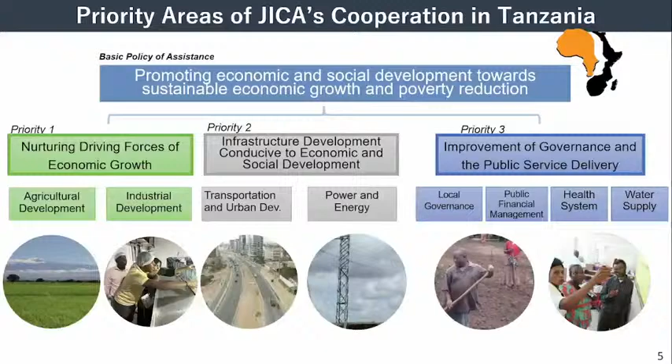In this pillar 2, we have sub-pillars: one is transportation and urban development, and the other is power and energy. So this priority is where we are mainly targeting infrastructure development.

I'd like to say again, there is an area for collaboration between these two countries. I sincerely hope the Japanese participants recognize this potential for future development and further collaboration.

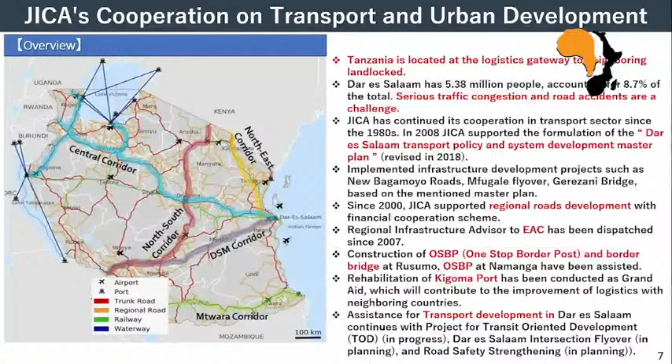I'd also like to talk about rapid urbanization. As the Honorable Minister has already mentioned, rapid urbanization is one of the crucial challenges, Changamoto, for African countries including Tanzania. In our activity in the transportation sector of Tanzania, we have been focusing on development of the regional road network and development of urban infrastructure.

The other trend is the increase of technical cooperation. As engineer Kakuya-san already mentioned, technical transfer is an important point of our experience and activity. JICA is also putting emphasis on technical cooperation, and therefore the number of technical cooperation projects has been increasing.

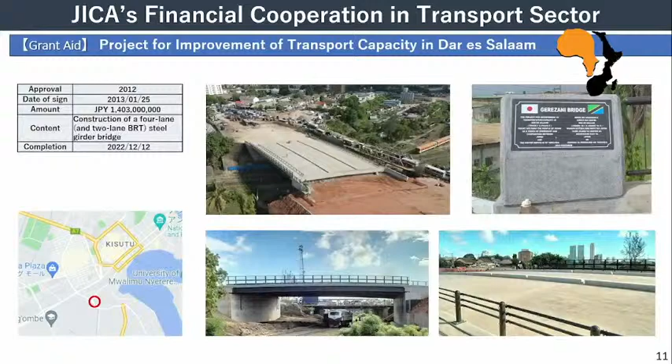We identified this project through the formulation of the master plan. You can understand how congested this area is, and this area was a crucial bottleneck of transportation in Dar es Salaam.

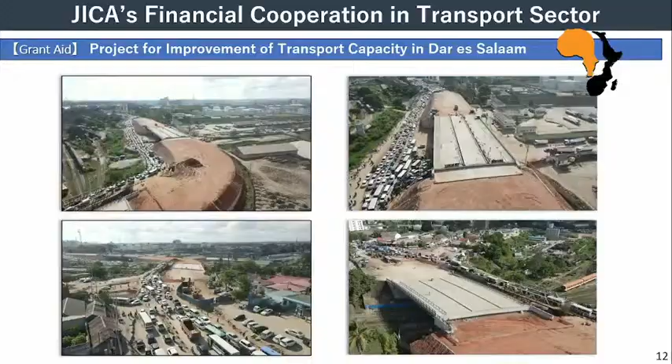I'm very proud that through the formulation of the master plan and the identification of the project, and then implementation of the grant aid project, we can contribute to solving these challenges in the transportation of Dar es Salaam. I heard that before this grant aid project, it took around 1 hour or 1.5 hours to pass this area, but nowadays it takes just 5 or 10 minutes. As your minister said, it saves cost and time, and contributes to economic activity and improves your living environment. I'd like to say again, I'm very proud that JICA has contributed to the development of your environment.

Next, I'd like to add another character of our financial cooperation, not only technical cooperation but also financial cooperation. JICA has contributed to capacity development. We have considered that the actual project site can be a good opportunity for capacity development of Tanzanian construction companies, engineers, workers, and counterpart agencies. You may already understand the good example of the Vietnam case, but I can say in Tanzania, in our project, we have contributed in a similar way. Concretely, we considered maintenance sincerely at the designing stage and the actual construction stage, put emphasis on quality control, and also took care sincerely about the safety of the construction site.

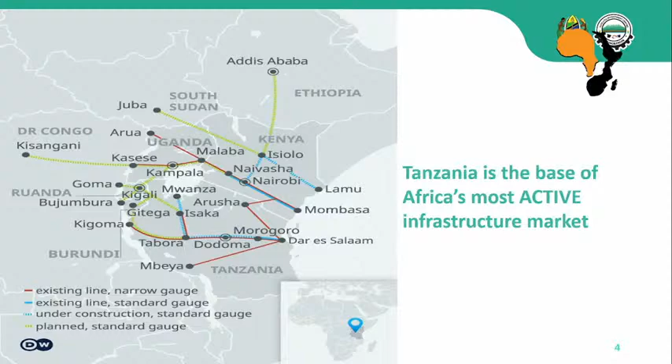When you venture into the markets, it will be easier for you with this infrastructure system. It's currently operational, with part already finished and the rest in progress. The idea is that we're going to be quite easily connected, with easy access to the East African part of the countries - from Tanzania to Rwanda, Burundi, Ethiopia, and DRC will all be easily connected for you to move from one place to another.

When it comes to power supply, definitely when you invest, power cost matters. When you compare Tanzania to the nearby countries, we're relatively lower cost compared to our nearby East African countries. From our island to our mainland, the prices are relatively lower compared to other East African countries like Kenya, Rwanda, and so on.

We mainly have 3 categories of investment in Tanzania. The first one qualifies you to be TIC registered. For a foreign investment such as yourself, the minimum threshold to qualify is $500,000, taking into account all your tangible assets for your investment. If you choose to partner with a local, we'll look at who has the most shares for qualification - if the local has majority shareholding, it will be $50,000 US, and if you have the major shareholding, it will be $500,000 US in terms of the value of investment.

For the other 2 categories, B and C - the strategic investor status and the special one - they are both government recognition statuses, whereby as a government we recognize the level of investment you've done in our country, and give you a chance to request custom incentives for your investment. They're called custom because it depends on the nature of your investment. Depending on what you need in addition, you can request, and TIC will present to the committee, and they will be discussed and approved, and you get to enjoy those plus the standard incentives everybody else gets to enjoy.

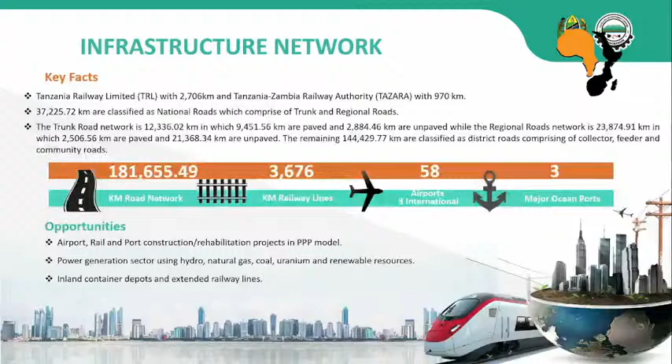We have projects available for PPP as well as for private investments, of which you could choose to take up for infrastructure network investment. For the energy sector, we have opportunities for oil and gas as well as electricity. There are also projects readily available for investors looking to take them up.

So if anyone has interest in this relevant project, we have them outside as well. We can share with you and link you with TANESCO and TPDC, who are also present in this room today.

So what we are promoting here is adding value to minerals, the whole investment of adding value and trying to reduce the rate of exporting our minerals raw. So there's also that opportunity here in Tanzania.

And for the water infrastructure, again, we are a developing nation, so we have lots of opportunity when it comes to the development of water infrastructure. The Ministry of Water has a number of projects that they're promoting as well that are up for investment. So for any investor within this field who has interest, we can link you up with them and discuss the way forward to take out those projects.

And for construction, real estate is up and coming right now. So lots of opportunities for real estate when it comes to hotels, residential housing, office complexes, malls, etc. As a developing nation, we have lots of opportunity for growth in this area as well that we encourage for investment.

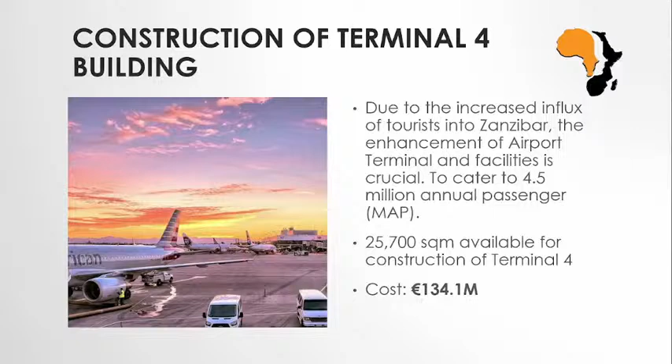Apart from the multipurpose port, we also have Terminal 4. As we said earlier, Tanzania is doing a great job promoting itself outside the continent, and as a result we are receiving a large number of tourists. Recently the government finalized and started operating Terminal 3 at the airport in Zanzibar, but that port is about to reach its peak capacity in terms of annual passengers. Because of that, the government has allocated approximately 25,000 square meters of land for construction of a new terminal building to cater to the increased numbers.

As we can see, the government is doing a very good job promoting our country outside. So this is another area where we are looking for investors to come and partner with the government to construct the new terminal building. For those interested in the design or technicalities of these projects, during our B2B session they can meet with the relevant ministry, our Ministry of Infrastructure, to get clarity on this project.

In terms of our procedures, when you want to invest in Zanzibar, it's very simple. The main sectors we look at are hotel and real estate, since they're the driving force of the blue economy policy, but we also have all other sectors categorized as others. For foreign investors, you require a capital of 2.5 million dollars if investing in a real estate or hotel project. For any other sector, you can have a capital of less than 2.5 million, down to 500,000 US dollars, as the capital required.

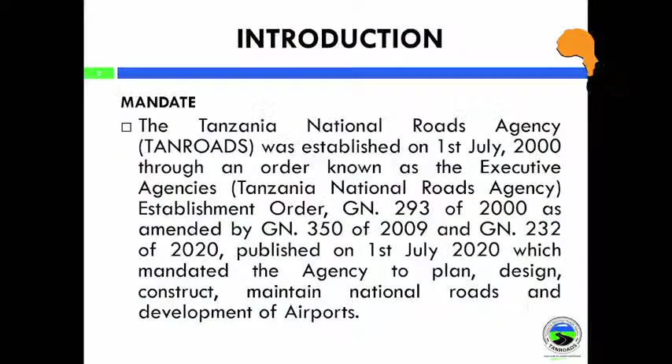As you may all be aware, TANROADS is an agency under the Ministry of Works established for the purpose of looking at the national roads, currently comprising about 37,000 kilometers. The country network at the moment is about 182,000 kilometers, but specifically TANROADS is looking for about 37,000 kilometers that is the national road network, the core network of the country that propels the economy. The other small roads connecting localities and short distances are managed by TARURA, a sister agency under the local government authority.

Out of the 37,000 kilometers that TANROADS manage, only about a third is bituminized. The rest is a gravel road network. This is a clear indication that we have a lot of opportunities in this area. We have a long way to pave these roads, and this creates an opportunity where we can cooperate with many of the counterparts, including JICA.

Tanzania delivers road transportation solutions utilizing about 9 transport corridors that are strategically located not only to serve the country, but also to serve the region. The key strategic corridors of the country are also part of the large East Africa transport corridor, which are vital for serving the other East African countries, as said by other speakers. Our network is also part of the great Trans-Africa corridor, serving not only Tanzania but East Africa and Africa at large.

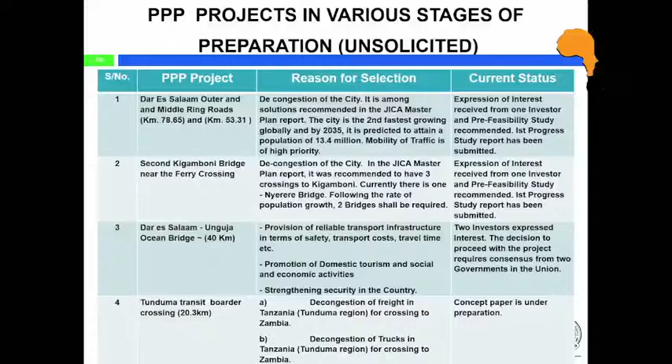As said by other speakers, the focus at the moment is not only on quantity but also quality. Realizing the traffic situation in Dar es Salaam, we are caught between maintaining the existing network and providing additional roads. As spoken by my colleagues from JICA, around 2017 the government of Tanzania, with support from JICA, established the Dar es Salaam Master Plan, and some projects identified in it include the Dar es Salaam Outer Ring Road, to increase roads and address traffic congestion in the city.

The other issue was the second Kigamboni bridge, which has already been presented here. We call it the second because the first one is already operational, and we are planning to build the second one at the place where the ferry currently operates.

There is also, whether we call it a dream or not, a dream to construct a bridge from Dar es Salaam to Unguja, or Zanzibar. This is one of the areas we welcome our colleagues to venture into, looking at the possibility, because the idea exists but has not yet been put into realization. There are several other issues related to traffic congestion, and a lot of opportunities available.

The Tunduma transit border is one of the areas highly in need of attention in terms of alleviating traffic congestion. At the moment, the situation at Tunduma as you cross to Zambia is really not good; the traffic congestion is really pathetic.

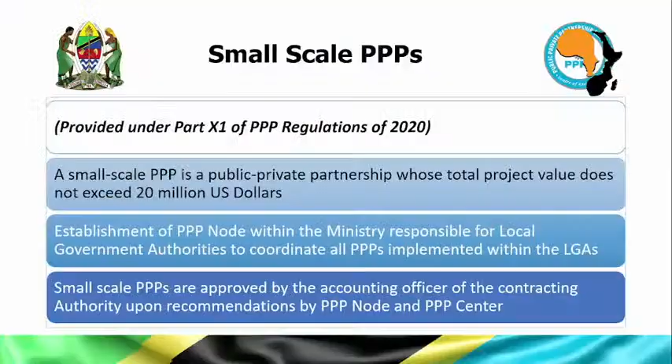These are under the local government authority; the ministry responsible for local government authority is the one who approves the pre-feasibility study of this project. Then the feasibility study has to be submitted to the PPP Center for scrutiny, instead of being submitted to the Steering Committee, which is composed of permanent secretaries, including the Permanent Secretary, Ministry of Finance, and other heads of agencies. This has to be approved by the contracting authority, the implementing agency implementing that project. For instance, TANROADS is implementing small-scale PPP, so the approval has to be given by the Director General of TANROADS. But for large-scale PPP, it has to go through the PPP Center and PPP Steering Committee for approval.

In a nutshell, that is the legal framework which governs the implementation of public-private partnership in Tanzania, which provides a conducive environment. There are many incentives for the private sector to be attracted to implement through this arrangement. As a PPP Center, we are there to make sure that all these projects are coordinated from the initial stage to implementation stage, scrutinizing the projects after the contracting authority has conducted the feasibility study, to see whether the project can be implemented through a PPP arrangement, and to ensure procedures are followed in accordance with the existing legal framework of PPP in Tanzania. Thank you so much.

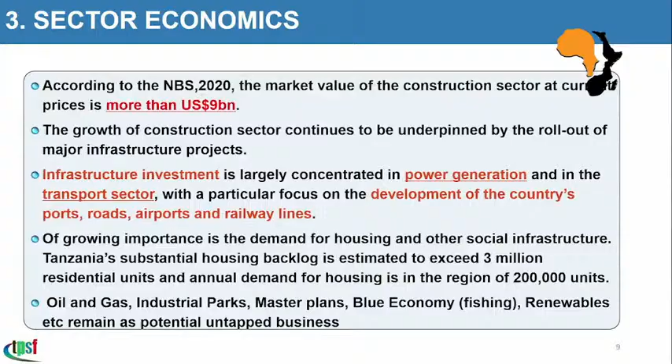Now, these are some figures—I think we've seen some of them, but it just tells the volume of the sector in the construction space. Infrastructure investment is largely, as we heard in the morning, in the transport sector, power generation, and of course mobility—meaning roads, ports, airports, and railway lines, which are quite active. And of course we've heard from TIC and ZIPA regarding housing opportunities.

But the last bullet is mostly on oil and gas—these are kind of new or not really so active industrial parks, the areas of master plan, blue economy, renewables, and of course these remain as untapped potential.

What I've not mentioned here is that we have ongoing effort by the government to introduce a national local content policy, which will guide and structure how the collaboration between Japanese or foreign companies and Tanzanian engineers and companies would look like in these opportunities.

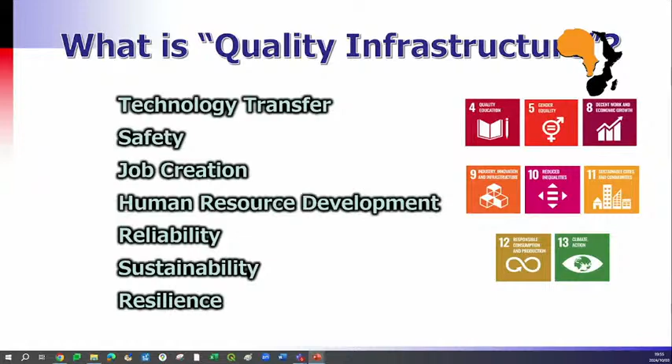Today, using the example of the Tema Interchange project completed in June 2020 in Ghana, I would like to explain how Shimizu implemented those aspects in our actual construction site. The Tema Interchange is located about 20 kilometers from the capital city Accra and about 5 kilometers from Tema port, serving as a crucial transportation hub in West Africa. It is a significant junction where two international corridors intersect. Before construction, it was a roundabout with very high traffic volume, leading to chronic traffic congestion throughout the day. After completion of the project, there was a significant reduction in traffic congestion.

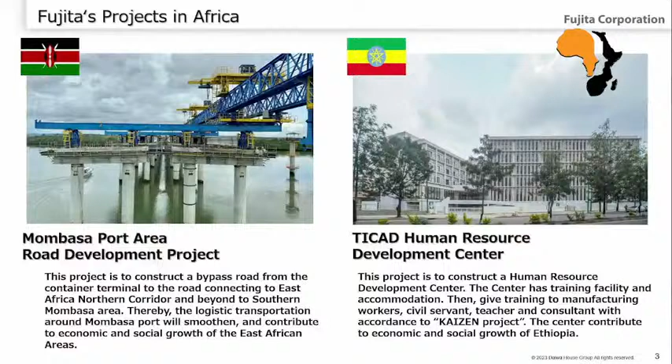Fujita Corporation is a general civil engineering and building contractor, established over 100 years ago, and is a member of Daiwa House Group, the largest housing company in Japan. In Africa, Fujita is currently performing the Mombasa Port Area Road Development Project in Kenya and TICAD Human Resource Development Center in Ethiopia. Fujita is making every effort to realize quality infrastructure through these projects.

Now, I would like to talk about the ongoing Mombasa project with the video. The left picture is from September 2019, before starting works. The right one is at the end of July this year. To bring the project to this point, we have been supported by many engineers and workers.

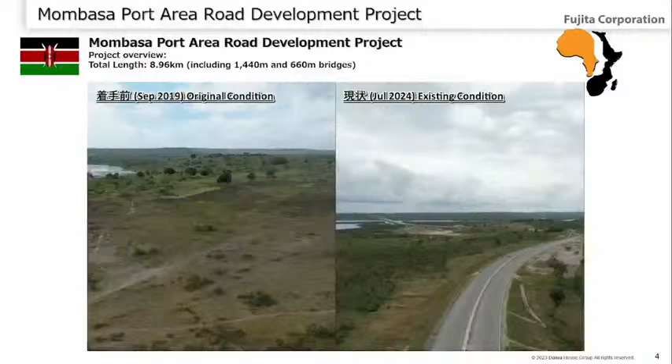I would like to introduce Fujita's efforts in technical transfer to local people through the project. We are committed not only to the successful completion of our project, but also to passing on knowledge of quality infrastructure technology to local people through these projects. As an example, we have held technical workshops and, in collaboration with the local construction association, established a qualification recognition system and issued qualification certificates for engineers and workers trained under the project. These efforts have been highly praised in the countries where they have been implemented.

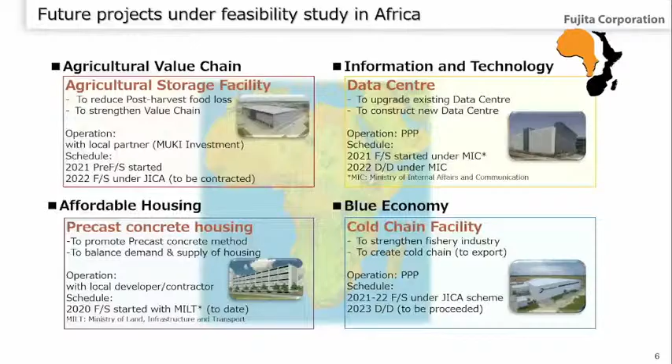Fujita is also carrying out surveys and studies on the feasibility of various projects with a view to the future of African countries. Some of our feasibility studies are for agricultural storage facilities and data centers, and affordable housing and future smart city plans. That concludes our efforts in Africa.

Next, I would like to introduce the technologies Fujita is currently developing. We believe there will be much more demand for quality infrastructure supported by digital transformation in the future.

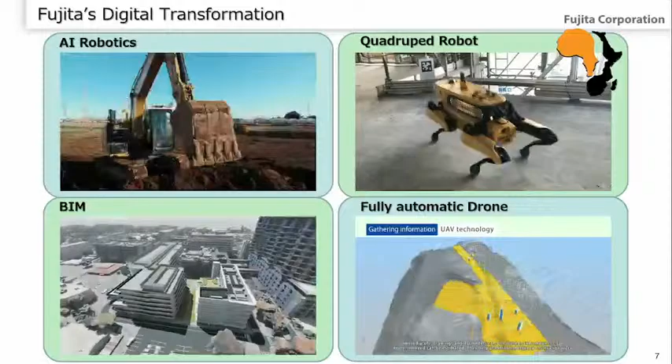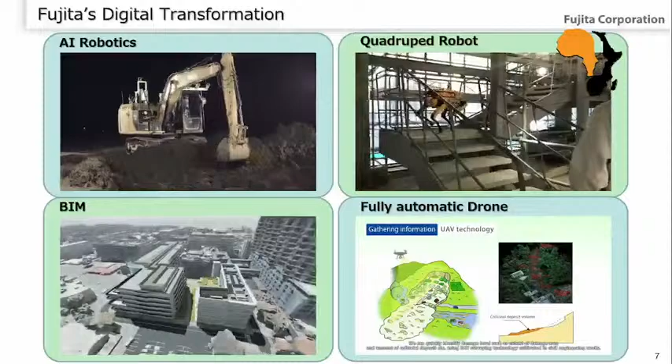The first, upper left, is an unmanned AI robot. Many machines automatically operate themselves. The second, upper right, is a quadrupedal walking robot equipped with a 3D scanner to automatically monitor work progress. The third, lower left, is BIM resident technology. We are able to move around freely in the BIM world by game controller, and this technology enables visualization of the construction site. The last, lower right, is a fully automated drone. It flies over a fixed location at a fixed time every day, surveying and capturing video footage.

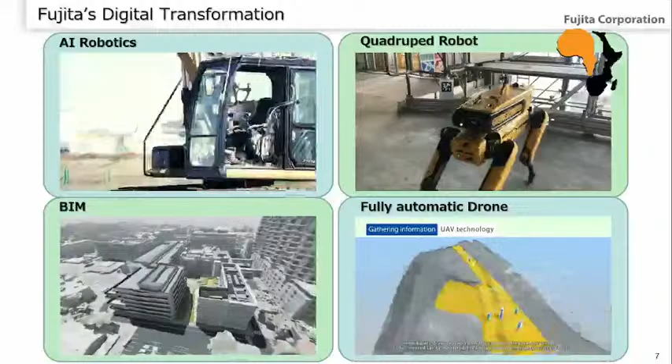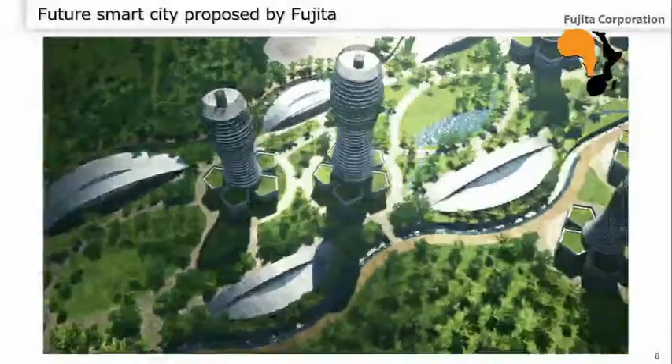Let me show you what Fujita is thinking of as an ideal future smart city. Fujita's vision is that an ideal future smart city provides people with safety and security, comfort, and is people-friendly. Please have a look at the image of the future smart city, rich in greenery. May I present our future smart city with various technologies for disaster prevention, a better environment, and energy saving. We propose a smart city of the future.

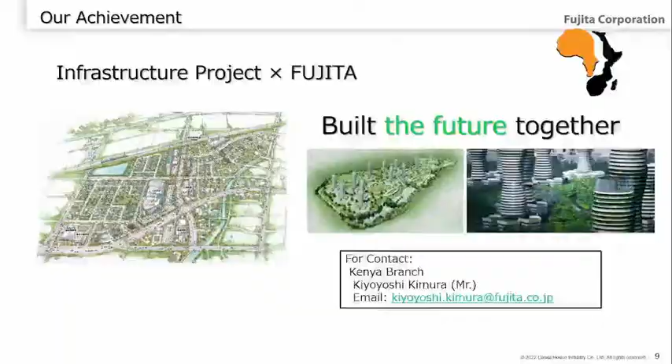Before closing, Fujita would like to make a commitment that it will spare no effort to realize quality infrastructure. I would like to conclude this presentation. Thank you for your attention. Asante sana.

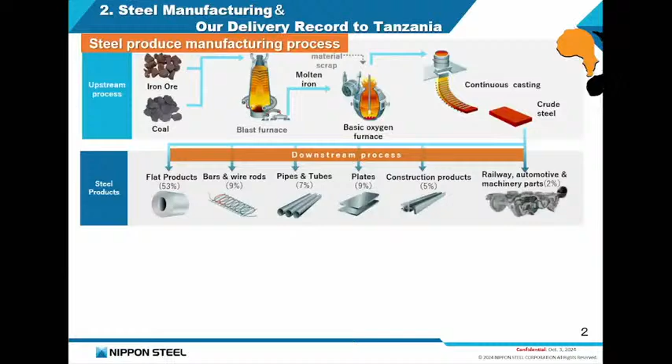I show you our Tanzania record. First, automobiles. Actually, our main customer is Japanese automakers. So if you are using a Japanese automobile, you are one of our indirect customers. Thank you for using a Japanese car.

Secondly, for the infrastructure project, railway. Maybe you know this is the SGR project. We are the one providing it to the main contractor, a Turkish company.

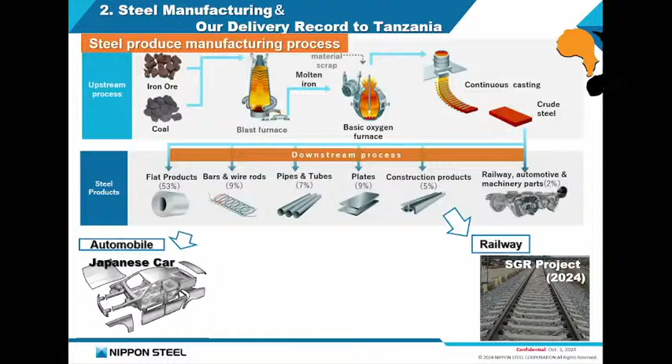And secondly, this is my main agenda, weathering steel. Actually, we have two delivered records. One is the Rusumo International Bridge, located on the border between Tanzania and Rwanda.

And secondly, the Gerezani Bridge, which is close by from here. Both bridges use weathering steel, simply saying no paint-free steel. We can expect this to reduce future repainting costs.

I'll show you more detail. What is weathering steel? Steel itself has corrosion resistance performance without painting.

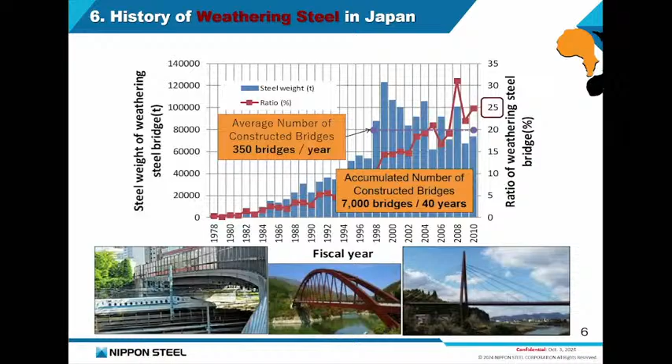This is our actual record in Japan. This weathering steel has been used since 1978, not only for overpass bridges in urban areas but also rural areas, arch bridges, and cable-stayed bridges. As of now, it accounts for 25% of all steel bridges in Japan. On average, every year we construct 350 bridges using weathering steel, totaling 7,000 bridges in Japan.

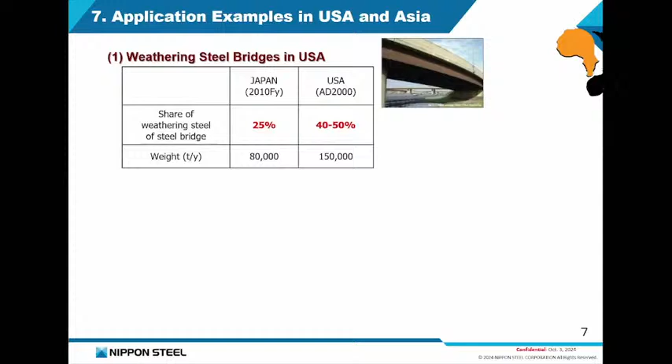Not only in Japan, but also in America it's very, very popular. I mentioned Japan uses about 25%. America is using more than 40 to 50%, not only for steel bridges but also steel structures.

Weathering steel is very popular in Asia too, Philippines, Indonesia, Thailand, something like this. First of all, it was under JICA ODA, but recently, as far as I know, in the Philippines and Indonesia, it's very popular. They use this steel for bridges under their local budget by themselves.

Long time ago, we did the same activity in Vietnam. We checked the applicability of weathering steel under Vietnam's climate by doing an exposure test. Finally, we issued a weathering steel guideline for design, with Vietnam University and the government also. Hopefully in the future I would like to do the same things in this country also. Please give me a chance.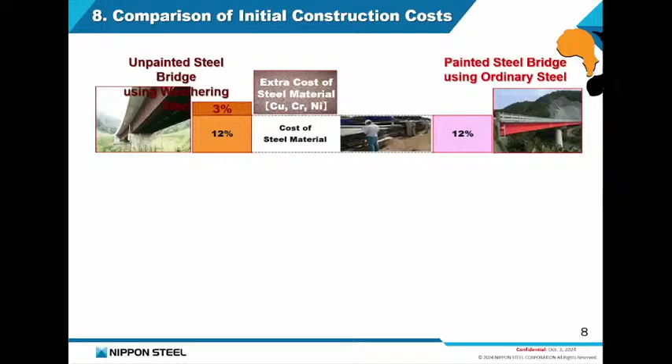I show you the comparison cost of the superstructure. First we have to buy steel materials, and when we make steel, we have to add some additional alloy, as I mentioned. After that, we fabricate the steel girder in the shop, cutting plate, welding, and assembling. After that, we have to paint. This is the difference. After that, we transport to the site plus subsidiary cost.

Totally 100%. On the other hand, weathering steel is 95%. This is estimated in Japan only. So the difference is here. After construction, we have to maintain in the future. This is the image of the life cycle cost. Normally in Japan, every few decades, we have to repaint for ordinary steel, so you can see a big difference in the future.

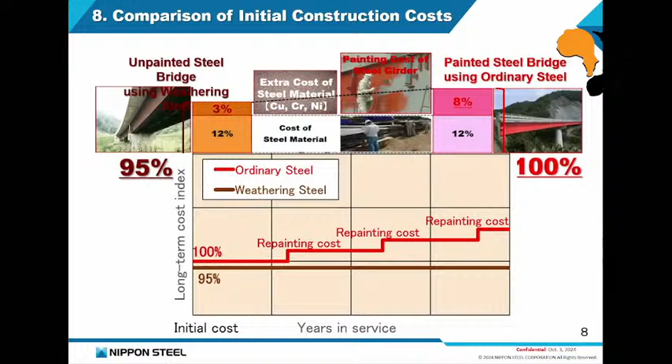This is my final slide. We have 3 actual records in African countries. The first record was in Zambia, completed in 1992. A few years ago, I had the opportunity to meet the director of the planning department of Zambia Road Authority. He said they never cared for painting in 30 years. I think this is one of the high-quality infrastructure products recommended by the Japanese government.

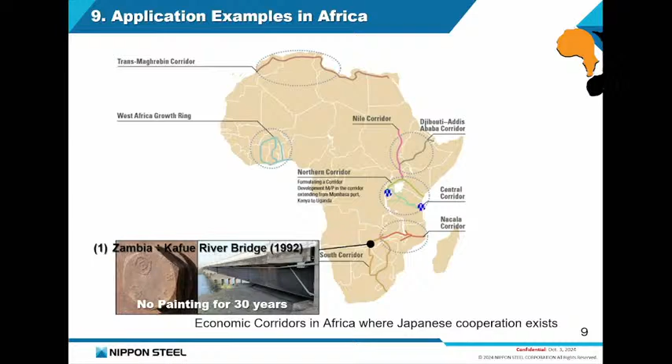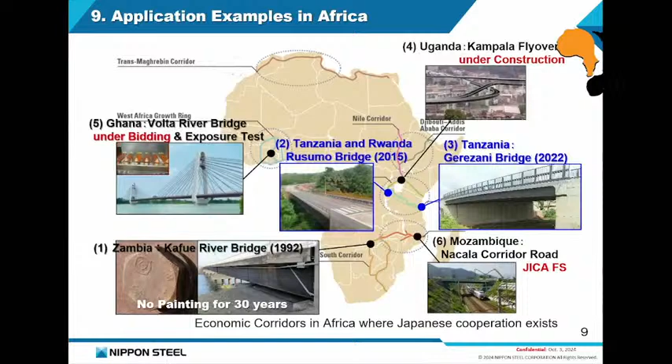Secondly, in Tanzania, as I mentioned, Rusumo International Bridge and Gerezani Bridge. I'm expecting in the future no need to care for painting. We are also expecting expansion in Uganda under construction, Ghana under bidding, and finally Mozambique in JICA feasibility study. In conclusion, I'm expecting this weathering steel to expand in African countries. We'd like to contribute to developing infrastructure by providing our high quality steel products. That's my presentation. Asante sana.

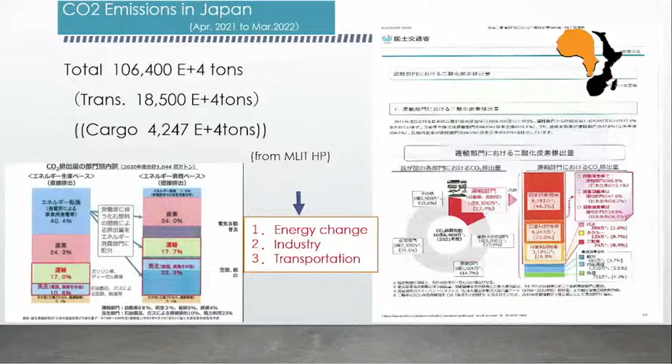In 2021, total carbon emissions in Japan were around 1 billion tons and something. Breakdown: 40% is from energy change programs, transportation area is 17%, the third share in this field. Road construction area discharged around 3.3 million tons. It is not such a big portion compared to other industries, but we need to try to reduce carbon emissions.

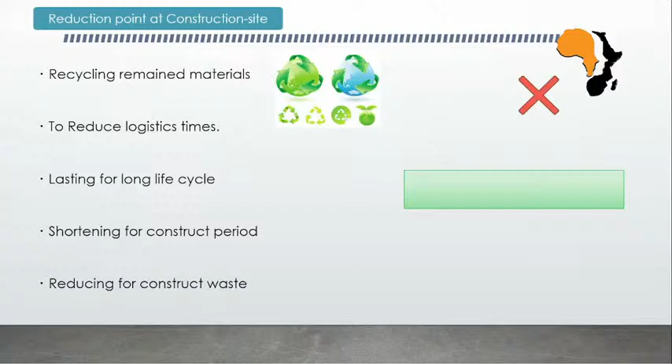For trying to reduce carbon emissions, first is to use a recycling system of remaining materials. Second is to reduce logistics materials moving times. Third, lasting for a long life cycle. Fourth, shortening the construction period. Fifth, reducing construction waste for a long life cycle.

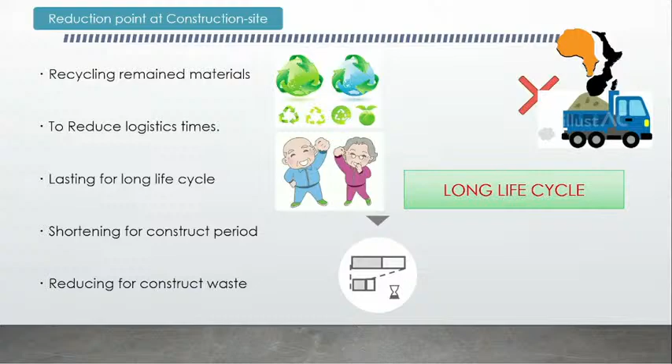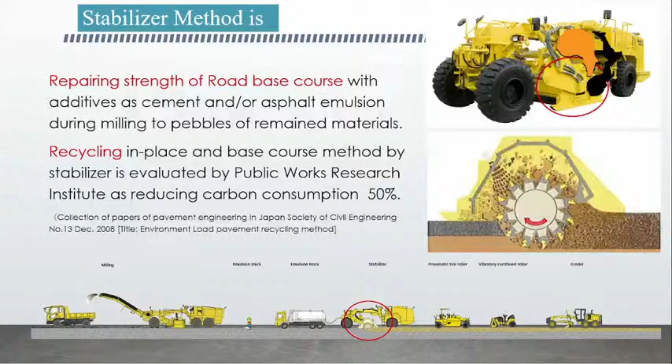This is reducing waste. Road stabilizer is this one, this much. This is a miniature. Road stabilizer method is for repairing the strength of the road base course with additives such as cement and/or asphalt emulsion during milling to pebbles of remaining materials.

Recycling in place and base course method by stabilizer is evaluated by the Public Works Research Institute as reducing carbon consumption by 50%. Road stabilizer construction is a recycling method to improve road base course strength in the upper part of this point line.

There are three types of road stabilizer method. One is from soil road recycle, second is from granular road recycle, and third is from damaged asphalt road recycle systems.

We wanted to show a typical Japanese job site for damaged asphalt road recycle, but we cannot show you our movies because of time limits. After constructing the base course with resilience by stabilizer and finishing with asphalt pavement using recycled mixed asphalt, this is a compression.

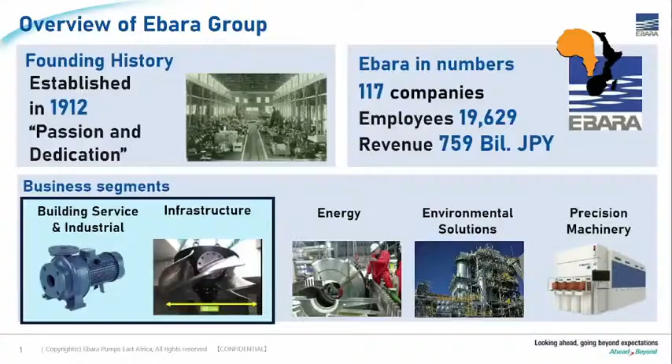Now, let me move on to the introduction of Ebara Pumps East Africa. It began operation in August 2022 as our first branch in East Africa. The mission is to deliver high-quality Ebara pumps to customers in East Africa, including Tanzania.

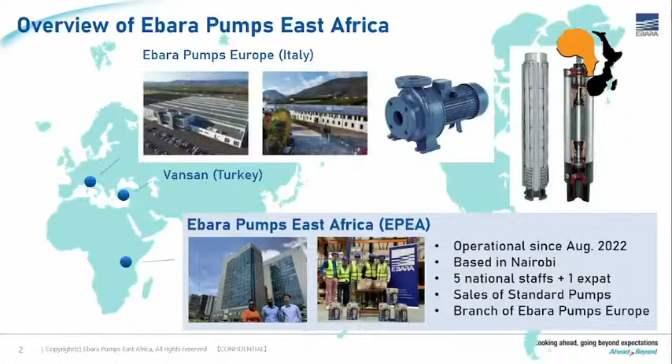One of Ebara's strengths is a wide product lineup that meets customer needs, from small pumps to large pumps. These are standardized water pumps. They are smaller in size and mass-produced. Therefore, they are cost-effective, and the lead time is shorter.

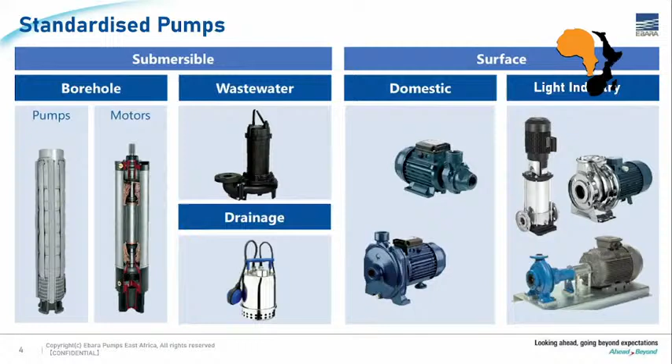Pumps are important machines that support infrastructures behind the scenes. From the next page, we will introduce some specific examples of pumping solutions in infrastructure.

First, let's look at water intake applications. The photo on the left shows our borehole pump working at a refugee camp in Kenya. The picture on the right shows our custom-made pump for river water intake, also in Kenya. They have both demonstrated high reliability even in harsh environments.

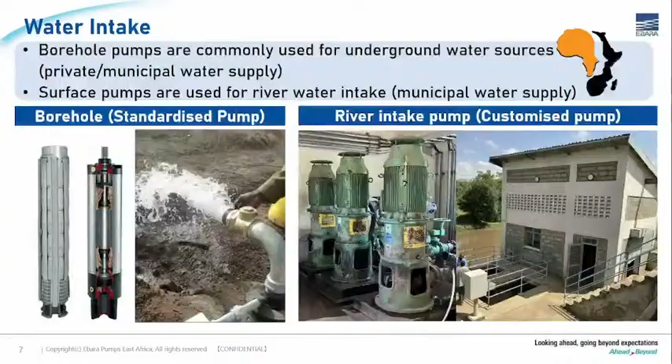Next is our wastewater pump. This pump can handle silted water, and it can be used in manholes, construction sites, and mines.

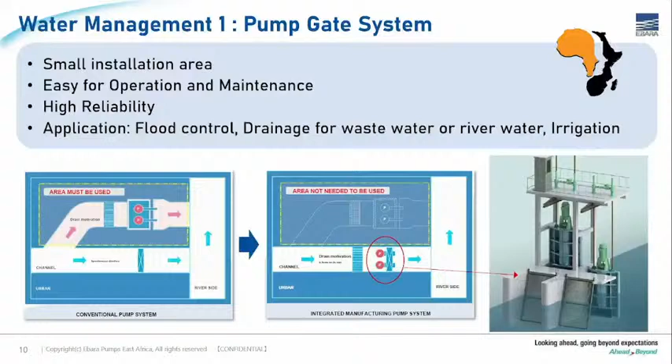Next is a pump gate system. It's an innovative solution that combines a drainage pump and a water gate, so it is suitable for small waterways where space is limited. This solution can also save construction time.

Next example is the inclined submersible pump system. This is a solution to save both initial cost and running cost with a simple civil structure. As the pump is mounted on a rail, its position can be changed in line with different water levels, making it a suitable solution for water sources with fluctuating levels.

Finally, I'd like to conclude by emphasizing our strengths. The first point is quality and efficiency. We have been manufacturing pumps since 1912, accumulating technologies and know-how over many years. We can therefore produce quality pumps, which gives us the biggest market share in Japan.

Our second strength is our local branch in East Africa. Our office in Nairobi will serve Tanzanian customers closer than ever, giving prompt responses to inquiries.

The third point is field service and training. No matter how good a product is, if it is not installed and operated properly, it will not be able to demonstrate its full potential. We will provide training to our customers in Tanzania to ensure that pumps are installed and operated properly.

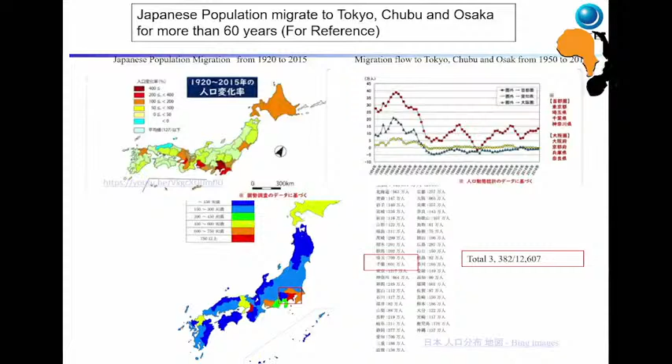In Tokyo, the development of the railway network has continued for over 150 years since 1872, creating a public transportation network. Additionally, the development of the expressway network began in the 1960s.

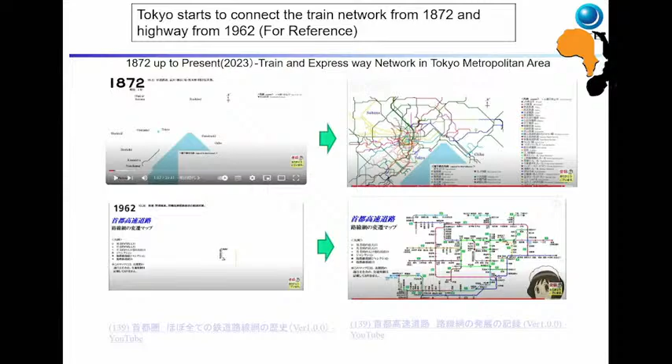Now I will introduce our company, JFE Engineering. JFE Engineering is located in Tokyo and Yokohama. JFE was formed in 2002 when Nippon Kokan, founded in 1912, merged with Kawasaki Steel, founded in 1950, and was reorganized as the JFE Group. We became an independent engineering division, with three sectors: environmental engineering, energy, and infrastructure.

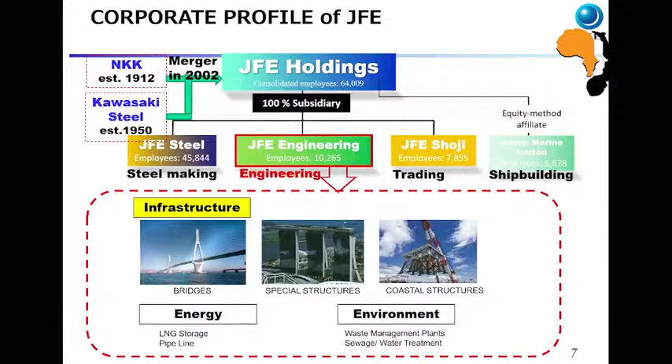We've been involved in manufacturing and erection of bridges, steel structures, and port facilities. Our overseas expansion began in 1960, and we've completed projects mainly in Asia, but also the Suez Canal Bridge and a Turkish project.

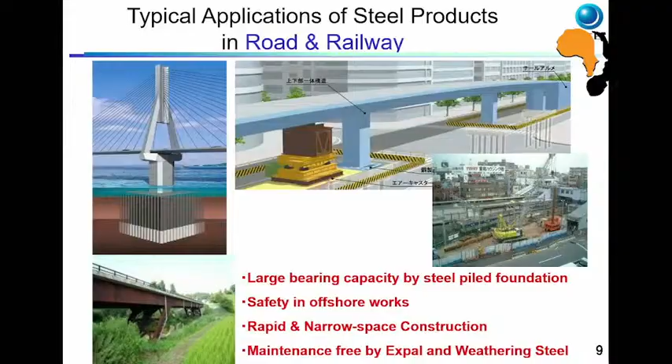The advantages of steel bridge construction include foundations using steel pipes with high bearing capacity, ensuring safety through factory-made steel girders, rapid construction in confined spaces, and the use of weathering-resistant steel, which Nippon Steel introduced.

For port areas, the benefits include deep sea port construction using the jacket method, rapid construction through factory production, and high durability. That covers port facilities.

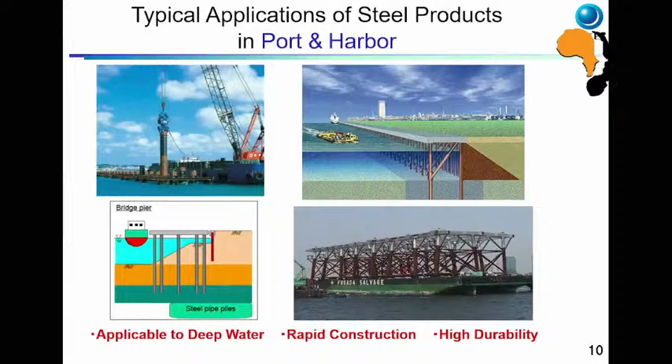Now I will explain the advantages of steel bridges as a rational solution for reducing urban congestion. First, the alleviation of traffic congestion through flyover bridge construction. Second, the minimization of construction area by using steel bridges. Third, shortening the construction period by using prefabricated girders.

Furthermore, the steel characteristic of being lightweight with high durability allows for rational design. Let's look at the specific features of steel bridges one by one. First, steel is lighter than concrete. Second, they are an industrialized structure. Third, they can accommodate complex load alignments. Fourth, they can be constructed in a short period with less on-site work. Fifth, repairing and reinforcement are easier to perform.

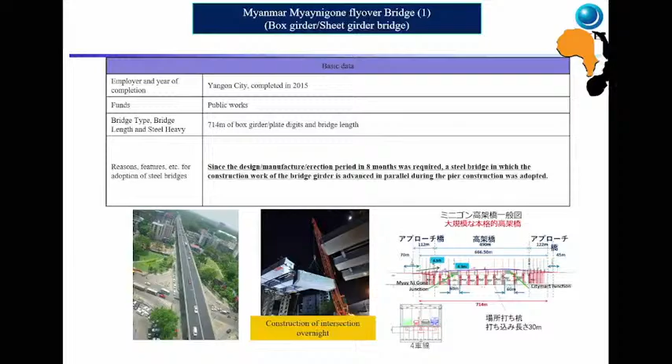The following project is the Myaynigone Bridge in Myanmar. This flyover bridge was constructed in Myanmar and completed in 8 months, including design and construction. Given the availability of construction equipment in Myanmar, we achieved a shortened construction period by starting steel procurement, superstructure fabrication, and substructure construction simultaneously.

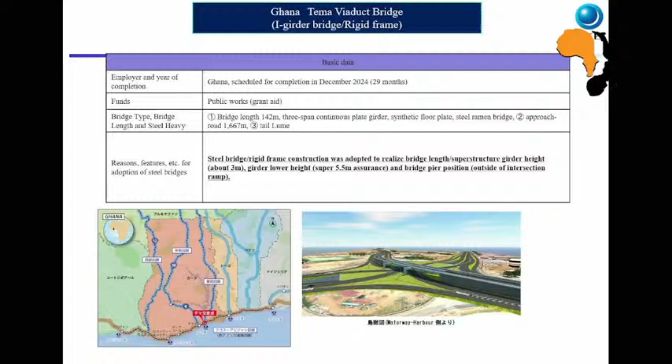The next project is the flyover bridge construction at the intersection of the Lagos-Abidjan corridor and the international road from the Tema port in Ghana. By using the composite deck slab and rigid connection between the girder and the steel pier, we implemented this to keep the girder height low, shorten the approach road, and position the pier outside of the intersection ramps.

We also developed the composite slab bridge overseas, where the girder and deck slab are integrated. This structure also keeps the girder height low and eliminates the need for formwork during construction. As Yokogawa Bridge, who will present later, has experience with this in Tanzania, I will omit further details.

The first steel bridge can be erected in one night or without a temporary facility by using block assemblies or the launching method. As I explained earlier, superstructure fabrication can begin while the substructure is being built, which shortens the overseas construction period.

In Japan, various rapid construction methods have been developed to address traffic restrictions during urbanization, such as extended launching nose and pushing out the girder, the cantilever method using a crane on top of the girder, erection of girder blocks using large machinery, and overnight erection using multi-axle transporters.

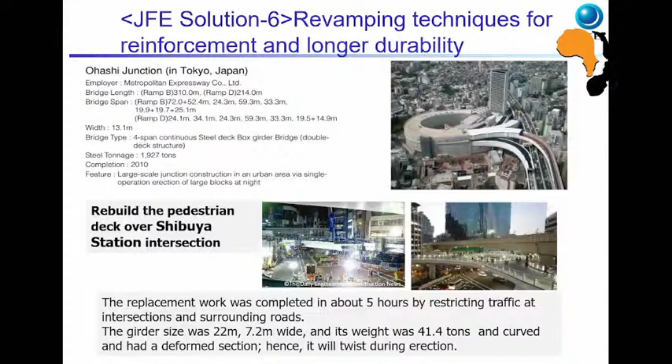Finally, I'd like to introduce one more advantage of the steel bridge: they can be reinforced and expanded to accommodate increased traffic volumes while utilizing the existing structure. This allows for meeting growth needs with minimum disruption to existing traffic.

JFE Engineering is at the forefront of bridge revamping projects in Japan's urban areas. For example, at the Itabashi and Kumanocho junction, we implemented the sandwich method to expand from 3 lanes to 4 lanes. This method involves encasing existing piers with new larger piers, allowing us to enhance functionality while minimizing the impact on existing traffic.

Considering these aspects, there are various advantages to adopting a steel bridge for flyover bridge construction in urban areas. We hope that Japanese technology, including that of our company, will be utilized in the development of Dar es Salaam, Tanzania.

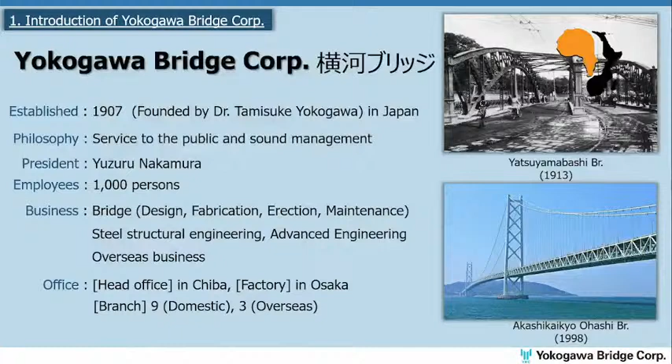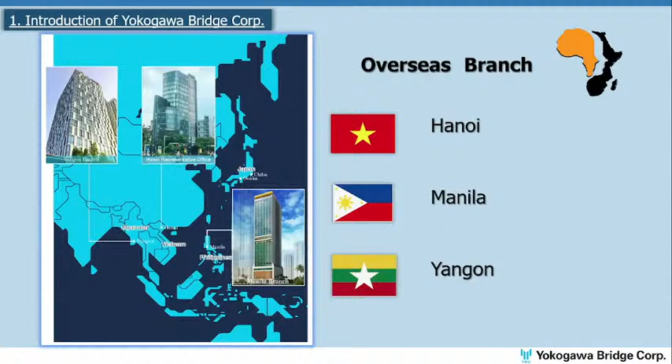Our overseas branches are in Hanoi, Vietnam, Manila in the Philippines, and Yangon in Myanmar. We have 3 branches, and now we are also making plans for Bangladesh. In the near future we will open a branch there.

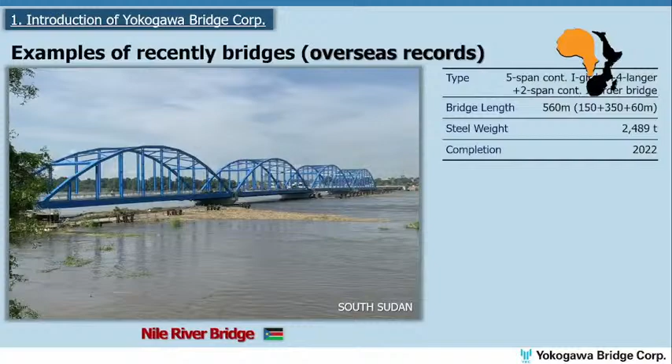We are making the Nile River Bridge in South Sudan. And so this one, nothing in the picture, but we are also doing the erection. So the Gerizari Bridge also, my company is doing erection as subcontractor.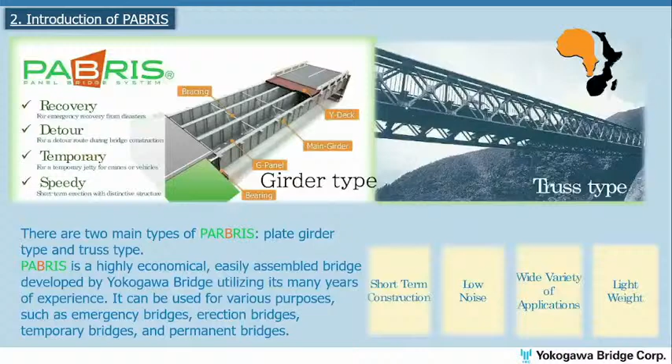And the next is introduction of the PABRIS. This is an easy component bridge, like this one. We have two kinds of type: the girder type and the truss type. And this one is like this. Please show me this screen.

This bridge already has the design made. So only fabrication and erection are needed. There's no need to design this system again.

And the span is 14 meters to 36 meters that we use. Okay, this is the combination of the girder, like this one.

And this picture shows a temporary bridge they use, and also an emergency bridge, and a temporary jetty that this system can be used for.

And also one more truss type. This one is, sorry, some word is inside this one. So for truss bridges, we have a double Warren truss and a lattice truss. We have two kinds of truss type.

This one has a span from 14 to 72 meters. We can make this bridge. So these are the components, panel units like this one, and the combination like this one. From 40 meters to 72 meters we are using this.

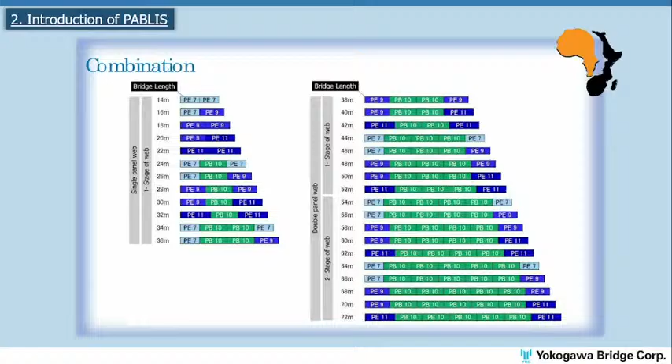So if you have a project like this, every time we get it in a country, we find the fabrication to a factory, and then fabrication happens in this system. And at that time, my company's supervisor will come to the country, and we teach how to make this bridge.

Then after that, the fabricators get this kind of chip, this scheme that we make, as a target.

So we prepared two videos. One video is from Yamagata Prefecture, Nanyo City, an erection by my company. And also the second video is from Shizuoka Prefecture, Gotemba City, where we did erection. So this one, we are making the crossover, the erection.

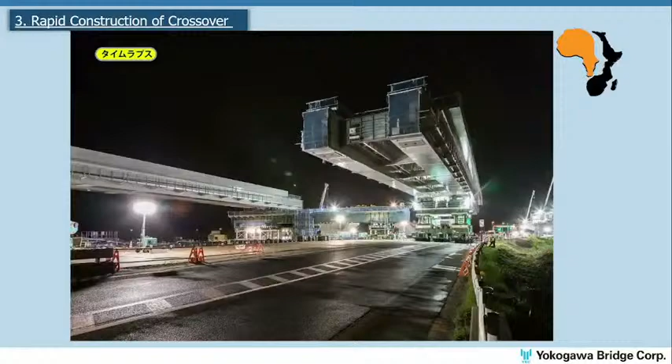This girder is about 120 meters, and the weight is 1,000 tons. So this one is moving to the erection area.

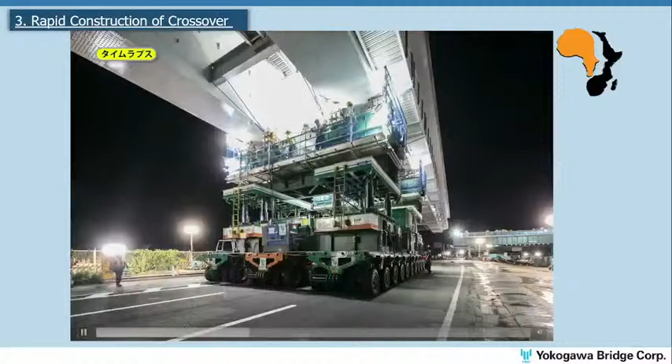Then after that, we jack it down, like this system, for erection. Also this erection only took one day to finish.

So at nighttime, we stop this crossover. After that, one night it finishes. After that, erection is finished. So we open it to traffic.

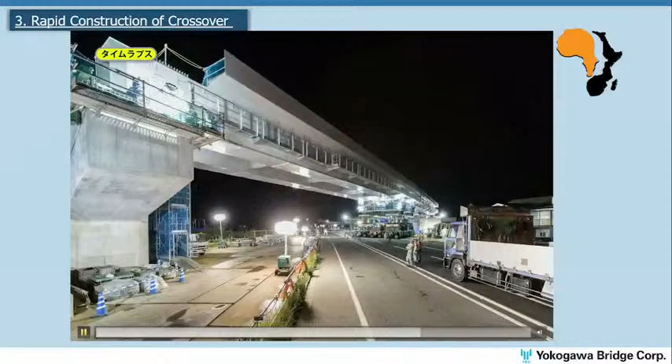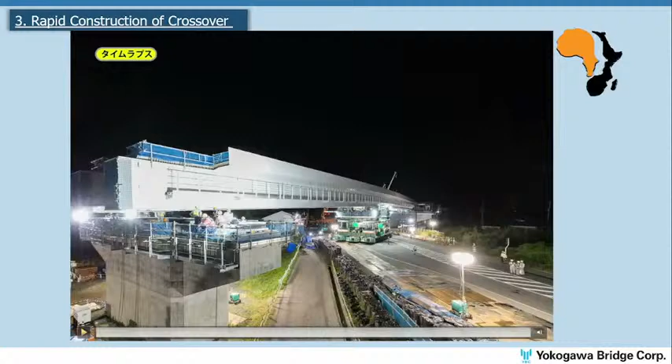After that, we adjust the location and jack it down. And one more video with...

Same as the crossover, but the connection method is a little bit different. This one also finished the erection in one night.

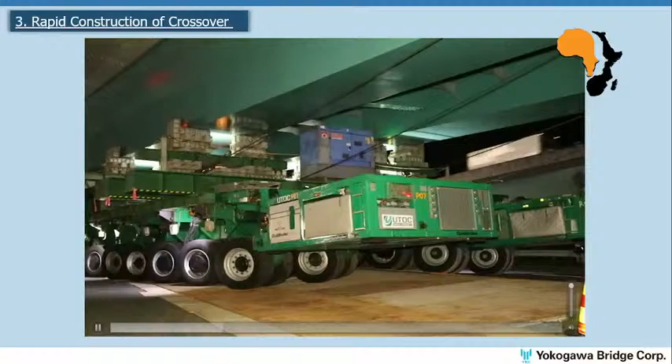So we are using the cable jack. This one is a cable jack. This one lifts up the girder and does the connection.

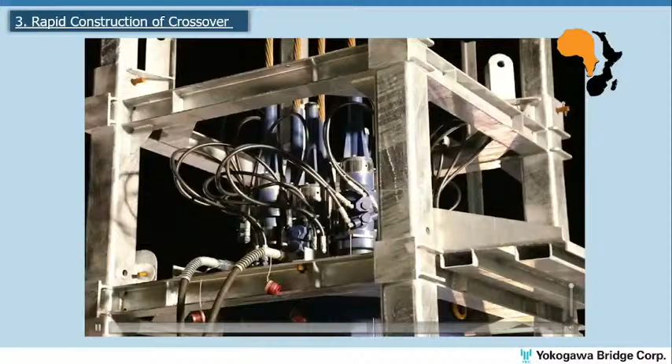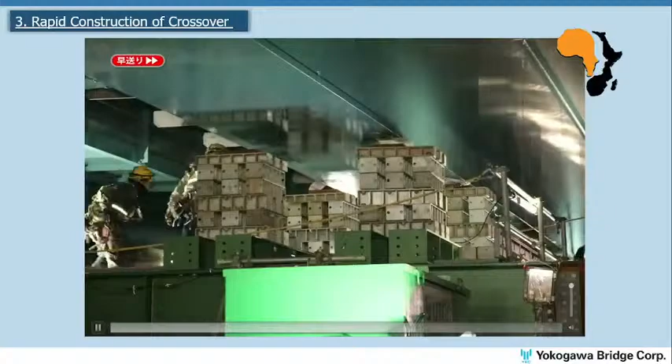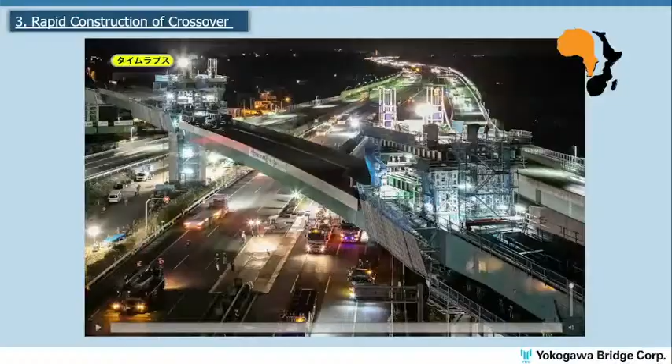Hi, this is the rapid construction of the crossover erection. So, okay, thank you for your attention.